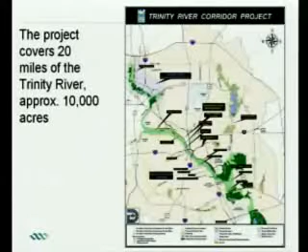It covers approximately 10,000 acres. We're going to have one of the largest urban parks in the country, literally walking distance from where we are right now. We like to compare that to probably the most famous urban park in this country, Central Park. Central Park is 840 acres, so we're going to have over 10 times the size of Central Park right here in Dallas for us to use.

The project has multiple components. The most important part, of course, is flood protection. As we've seen so much in the past few years, we have to keep people safe in their properties and in their lives, no more important than this year. This is the 100th year anniversary of the last time we had a 100-year flood, and so we've got to keep people protected from flooding.

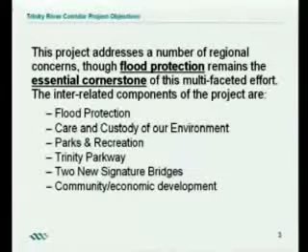But we also need to take care of our environment. We've got a lot of really nice recreational features that we're going to be providing for you. Our transportation components include the Trinity Parkway, signature bridges, and also some work on Sylvan and Beckley. And then, of course, we certainly hope this project will be an economic generator for the City of Dallas.

A little bit of timeline background on how we got here. Back in May of '98, the Trinity River Corridor Bond Program was passed for $246 million. Now, this is a $2 to $2.5 billion project, so we have to have additional funds coming in. We have great partners with the North Texas Tollway Authority, the Texas Department of Transportation, the U.S. Army Corps of Engineers, and Dallas County. Over $25 million in private funds have come in for this project. So we have a lot of great partners helping fund this project.

In March of 2004, we adopted our Balanced Vision Plan, which provides all the concepts for the many components of this project. Let's first talk about flood protection.

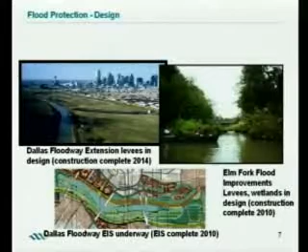We've got several components under design right now. Our Dallas Floodway Extension Project will extend our existing levees 5.5 miles downstream to protect areas that don't have flood protection now. Up in the Elm Fork area, we also have some levees and wetlands for flood protection. And in the downtown area, our levees will be raised slightly to protect from flooding in that area.

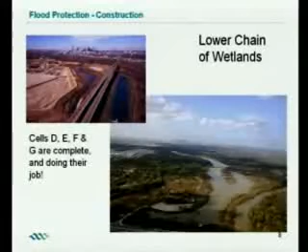So even though these wetland cells are located south of here, they are literally helping to reduce flood levels in this area so that it doesn't go up and over the levees. So we're very proud to see these in service.

Now, these are some pictures also of that same flooding area, but you'll see when these wetland cells, when the water recedes, they will still have some water in them. It'll be an area for wildlife habitat. You'll be able to access these areas from the Joppa neighborhood and then also from Loop 12 — the construction bridge that was constructed to help build these wetland cells will remain, and it will be an access point into these areas.

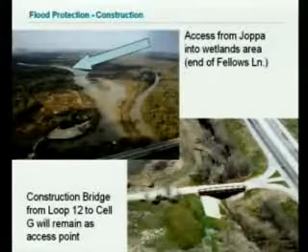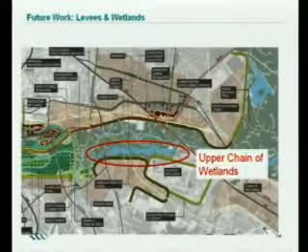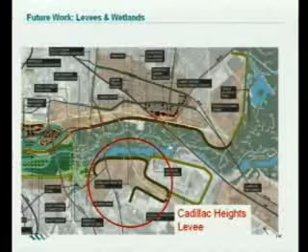Future work on the downstream area includes another chain of wetlands that'll go from the rail line down to I-45. We're going to be protecting the Lamar area with a levee on that side, and also on the other side, the Cadillac Heights levee will get built to protect that neighborhood. The existing levees will be raised by as much as 2 feet, providing additional protection for the West Dallas area and all the areas along the levees from the 800-year flood. So that's a great amount of flood protection we have from the Trinity River.

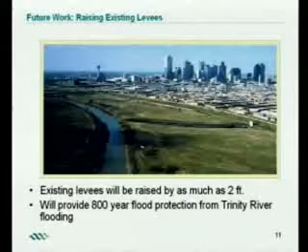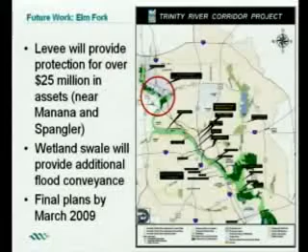Up in the Elm Fork area, we'll provide a smaller levee that will protect over $25 million in assets in the areas near Manana and Spangler. A wetland swale will help with flood conveyance in this area. We expect to begin construction in the fall of this year, and we'll have our plans earlier this year.

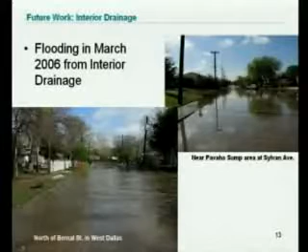Here's some pictures that may be more familiar to people in the audience. This was the flood of March 2006. This is a different kind of flooding, from interior drainage. This is the rainwater that has to get to the Trinity River, and sometimes it can't get there fast enough. So what does it do? It backs up into the streets and the homes. So we have a plan to protect the areas from interior drainage, from interior flooding.

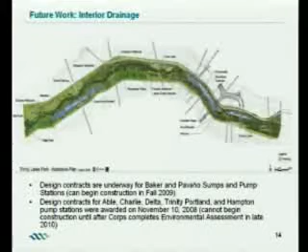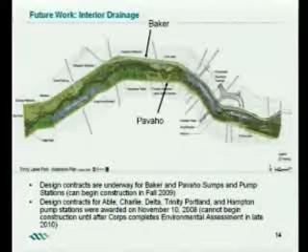Here's the area encompassed by the levees. There are two pump stations we are working on right now with designs, the Baker pump station on the downtown side and the Pavaho pump station on this side of the levees. We'll begin construction on those in the fall of 2009. Then we'll be starting design contracts for Able Pump Station and Charlie Pump Station, between the Houston and Jefferson Street bridges. And we've got pump stations Delta, Hampton, and Trinity Portland that'll begin sometime in late 2010.

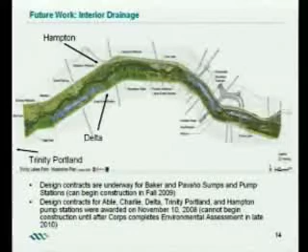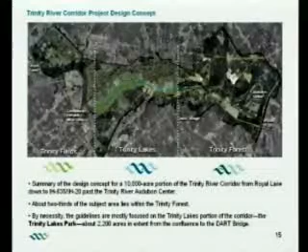Moving on to our recreational features, the Trinity River Corridor has been divided into 3 sections geographically: Trinity Fields up in the Elm Fork area, Trinity Lakes in the central area, and Trinity Forest further downstream. You can note the different designs of our branding, a different brand for each section of the project.

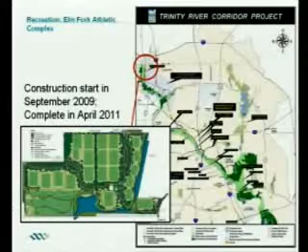Moving first to recreation in the Trinity Fields area up in the Elm Fork. Dallas really needs a lot of soccer fields, and we need a lot of them all in one place so we can host large tournaments, international tournaments, high school and college tournaments. We're going to have one located just west of I-35 in Walnut Hill, building it on an old landfill, converting it into 22 soccer fields. We expect to begin construction late next year, and we'll have that complete in 2011.

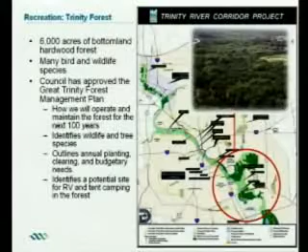Moving downstream to the Trinity Forest, we've got 6,000 acres of bottomland hardwood forest, one of the largest urban forests in the country. We've found many bird and wildlife species down there, and we have a plan to protect, maintain and operate this area. We're going to provide wildlife habitat, and learn how to plant, when to clear, and what our budgetary needs are. We've also identified a potential site that might be good for tent camping or RV camping down there. These are the things we're going to be exploring in our Great Trinity Forest.

If you haven't been down there, I certainly encourage you to go to our Trinity River Audubon Center. It's a fantastic facility located off of Loop 12 down in the south. If you're traveling I-45, take Loop 12 toward the east, go about 2 miles, and you'll see the sign for it. This is the educational wing, the wet laboratories they have for the kids to go and learn about the birds, wildlife, and plant life.

It's interesting to note this building has been built for this area. It's very green. Note that the windows are slanted at about a 12-degree angle, to keep the birds from bird strikes, since sometimes birds see their reflections in the windows and want to fly into it. So they've really taken care of the birds in this area.

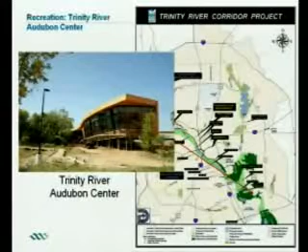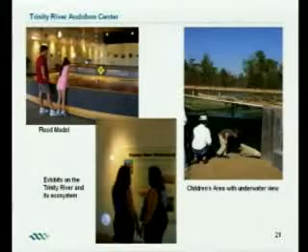You'll see they have exhibits, a flood model, lots of exhibits about the Trinity River and its ecosystem. One of the wetland cells actually has a window in it so you can see the fish swimming around, along with a lot of other green features.

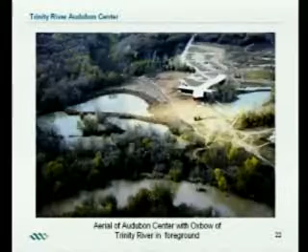So I encourage you to go out there. The third Thursday of the month, it's free, and it stays open later that night. So I would encourage you to go out there anytime, really - it's a wonderful place to go.